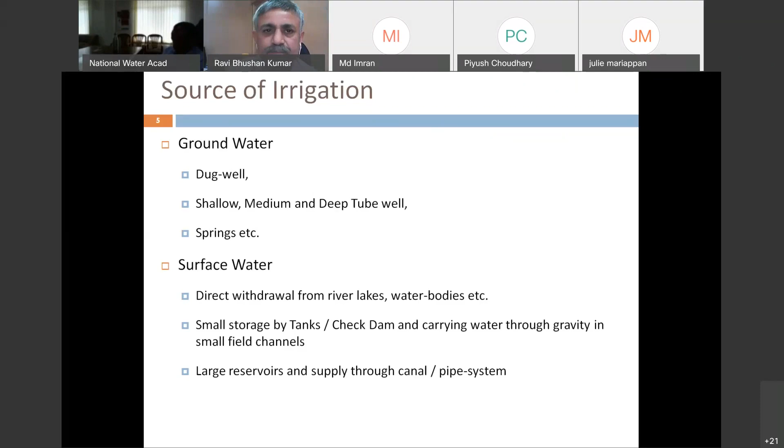Before we go further, I wanted to give an overview of how we categorize projects depending upon their size, into 2 or 3 categories. First is minor irrigation, categorized by the culturable command area—the area covered by that particular structure. If it is less than 2,000 hectares, we call it a minor irrigation scheme. If it is between 2,000 to 10,000 hectares, it's a medium irrigation scheme, and beyond that is called a major irrigation scheme. Minor irrigation schemes are serviced by either surface water or groundwater.

We have made an assessment of the ultimate irrigation potential—that is, whatever means we use, the maximum area we can irrigate through a particular source. By surface water minor irrigation, we can cover an area of about 17 million hectares in the entire country, while through groundwater we can cover an area of about 64 million hectares. The ultimate irrigation potential in the country is of the order of 140 million hectares. These are basically serviced by surface minor irrigation and groundwater minor irrigation.

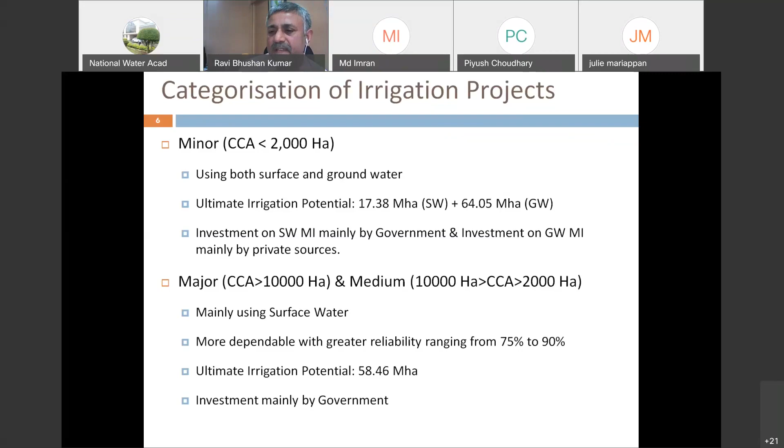So the dependability on minor irrigation is very less, whereas dependability on major irrigation is more. It is around 75 to 90%. That means we are sure that with this dependability, we can provide water to any particular field.

So as far as our assessment, the ultimate irrigation potential through major and medium projects is of the order of 58 million. And since this involves very big structures, the investment in these major and medium irrigation projects is mainly done by government.

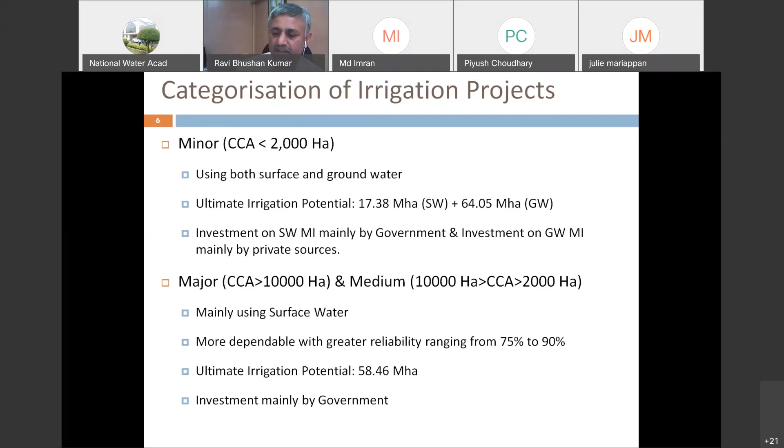As you all know, irrigation is being practiced in our country from the very past. Even we have records of inundation canals being constructed during the Indus civilization era, and ruins of many ancient irrigation projects are found scattered all over the country. Many such interventions were done by various rulers during their reigns to support irrigation in these areas.

Some very important structures I can mention, one is near Hampi. You can find many such works over there, scattered at different places. During the past, it was mainly through ponds constructed at different places to support irrigation, or at maximum through inundation channels, which take off from a river and irrigate lands. So the earliest example of any big system is basically the Grand Anicut of the Kaveri River.

That was developed something around the first century. This particular system was developed for irrigating the delta area of the Kaveri.

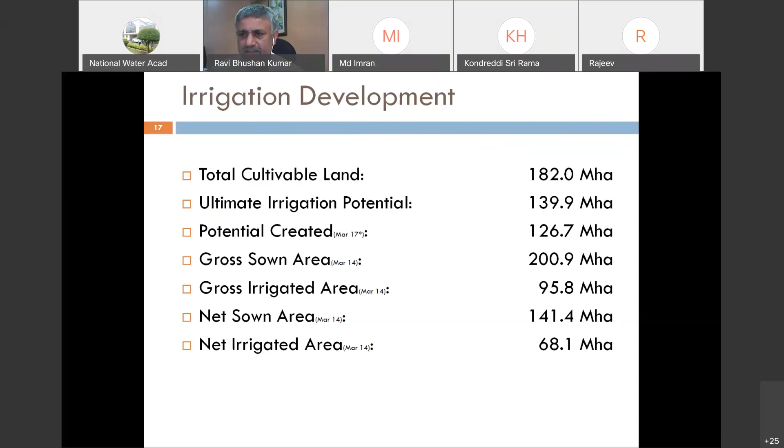Right now we are in a comfortable position. We are not only growing enough for our entire population, but to some extent some amount of export is also there. So at present our position is very comfortable, but we have to continue this pace of development so that we can support our population by the end of 2050, by which it is estimated our population will get stabilized. So we are planning for 2050 basically.

Now I will tell you something about the role CWC has been provided in developing irrigation in the country. As per the constitutional arrangement, the responsibility of implementing, designing, or planning these projects lies with the state. State governments have to plan, implement, and operate the structures in their respective jurisdiction.

But the role of central government is limited to a catalytic role—promoting states to develop irrigation potential where states are lagging behind. We are also financially supporting them so that irrigation can be developed in an equitable manner across the country. So the role of central government is basically catalytic, promotional, and to some extent adjudicatory. We are basically coordinating this.

If a project has coverage in more than one state, we coordinate this aspect. If there is any dispute among the states, we adjudicate those disputes so that a negotiation can be arrived at and the projects can be implemented. So the role of central government is limited to coordination, promotion, as well as adjudication.

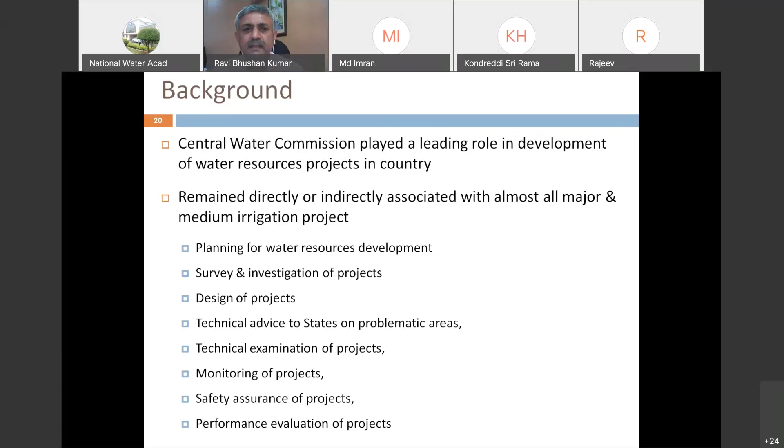I will just briefly go through these activities. The slides are available with you, so I'll briefly go through the activities because we have less time available with us. For example, if we see the planning aspect, whatever planning was done.

The role which CWC has is to take up assessment of water resources. Until and unless you have a measurement of any quantity, you cannot plan. So Central Water Commission was given the responsibility of assessing water resources availability in the country. We have done this exercise 2 or 3 times in the past, and we came up with the figure of how much is available with us. Central Water Commission is actively associated with Planning Commission in its various committees and working groups, and helped in the formation of successive plan periods. We provided all sorts of technical help to Planning Commission in taking up this exercise. Then in 1980, we came up with a national perspective.

As per this, it was felt there are many areas where we have more potential available, but the use of that potential is not there. So this excessive resource which is available at one place can be used in other places. So we came up with a plan which we call the National Perspective Plan.

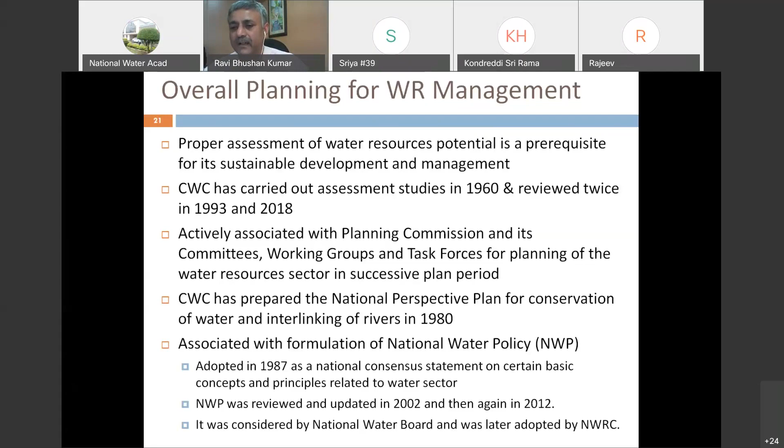The plan is now called interlinking of river basins. It was basically to get the water which is available in surplus areas to benefit areas having less water. That plan was prepared and formulated in Central Water Commission. Then we had the national water policy, and Central Water Commission played a very effective role in the formation of all these policies.

Nowadays it is felt that water resources should be planned in an integrated manner. For that purpose, a commission was formed in 1996, which went into various aspects and gave its recommendations on how to manage water resources in an integrated manner, and CWC actively participated in the formation of those. After that, we are now taking up integrated water resources studies in various areas.

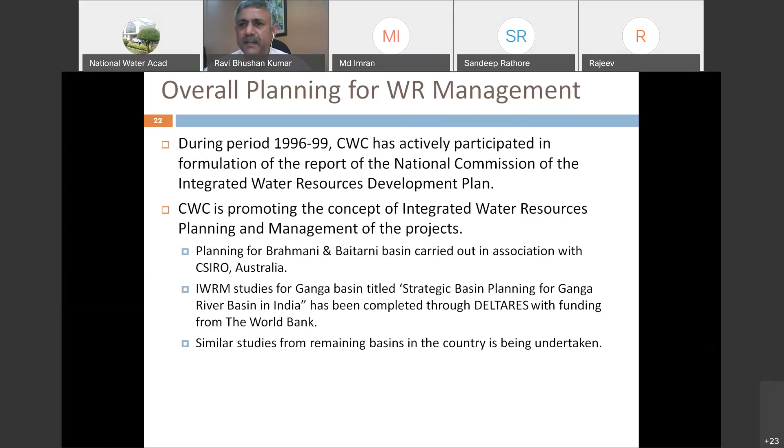Another important aspect is that we are collecting hydrometeorological data, and this data is very much needed for planning of water resources in the country. We are collecting such data at not less than 1,600 places, and they basically form the basis for planning of water resources projects.

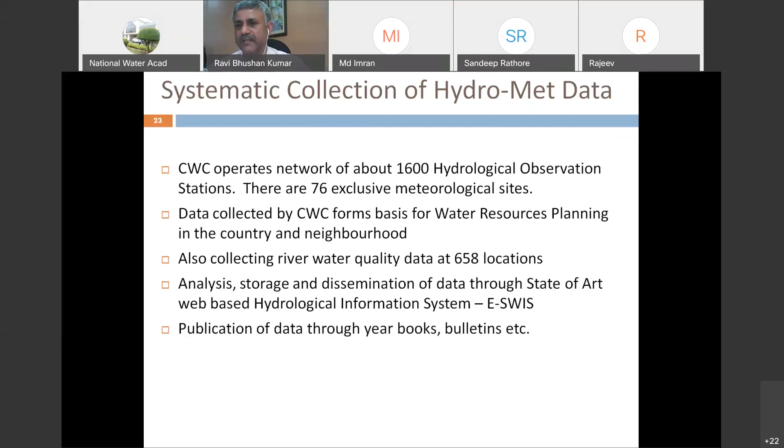We publish this data in the form of yearbooks which are utilized by state governments for planning of projects. This data is also available in the form of India-WRIS. Earlier it was India-WRIS, now this is being further redeveloped and will be available as the Water Information Management System. It is now available in that form.

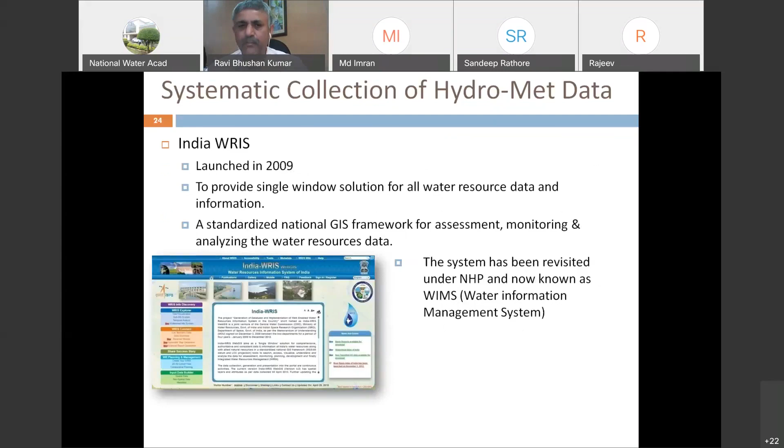Then there is design consultancy. We have supported states in planning of projects, design of projects, providing consultancy for troubleshooting, standardization of engineering practices, and special studies like dam break analysis. We have supported state governments with these types of things. At present, there are more than 70 projects for which design consultancy is being provided by central government.

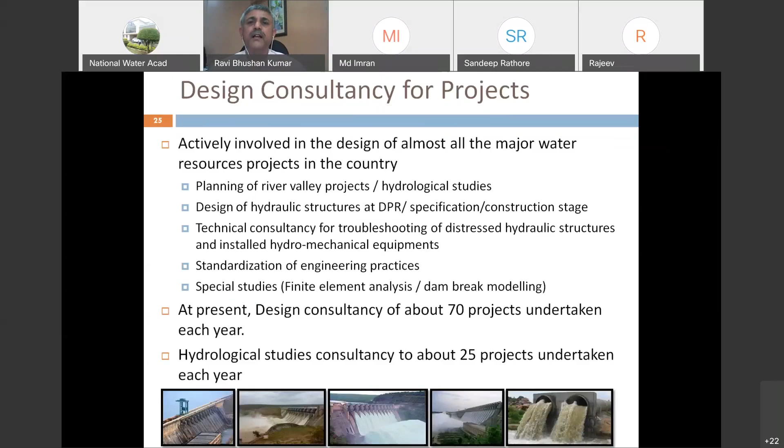These are some of the projects, only a few, which were important projects in which CWC was involved to a very large extent.

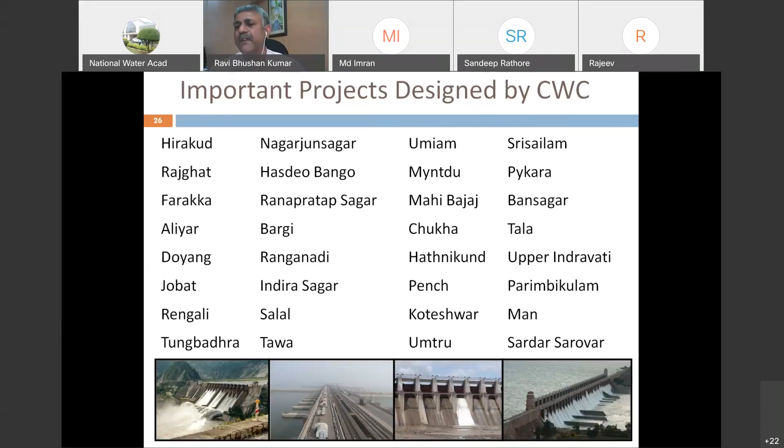Survey and investigation support is provided to states which are not capable of formulating the DPRs. Nowadays, some northeastern states, Jharkhand, and Jammu Kashmir are taking help from Central Water Commission in getting their DPR formulated. We are also supporting Nepal and Bhutan; many projects are being investigated there as well.

Then there is techno-economic appraisal. This has been done since 1954, supporting the Planning Commission in this regard. Now we are basically appraising major and medium type projects which have interstate ramifications, and flood management projects are also being examined.

We categorize large flood management projects into minor, medium, and large; large projects are appraised by Central Water Commission. We also support CEA in examination of hydro projects, which are projects specifically made for hydroelectric production, looked after by the Central Electricity Authority. We examine the civil and technical aspects, the proposed dam and structures, for CEA.

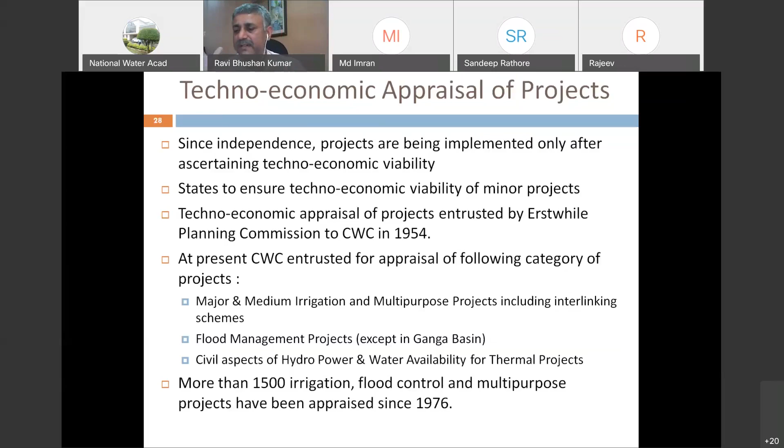From 1975 onwards, we are providing support in monitoring of projects. Right now, the projects monitored are basically some of the major projects being implemented by the states.

All the projects getting financial support from the Ministry of Water, Central Government, are monitored by Central Water Commission. This includes implementation of projects, command area work, and flood management projects. If it is an externally aided project, we also do monitoring on request basis, such as when the World Bank or any agency asks for it. On a sample basis, we also monitor the implementation of RRR of water bodies and CAD&WM projects. So all these things are monitored by CWC to some extent.

Central Water Commission is also using web-based monitoring service with the help of NRSC. We now have association with one agency, I don't remember the name right now. So we are trying to monitor these projects through satellite images also, to see what is the progress under them.

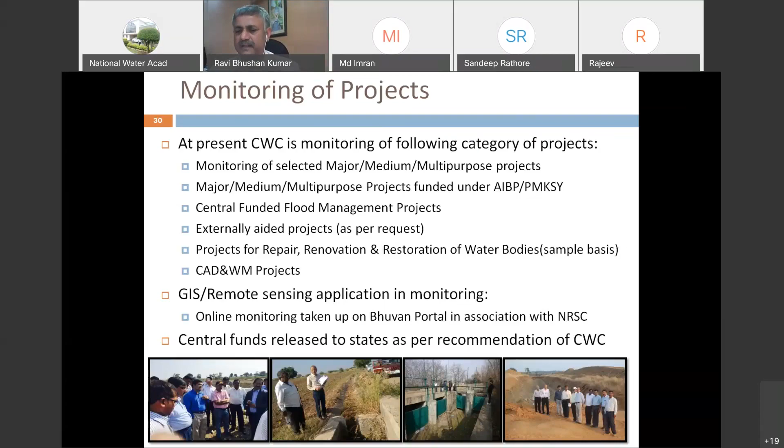The central funding to the state is basically provided after the recommendation of Central Water Commission. After we monitor the project, if we say it is working satisfactorily, then funds are released to the state.

Then for interstate coordination, whenever a dispute is there, we support the negotiation process to arrive at an amicable solution. If an amicable solution is not arrived at, tribunals are formed, and we provide technical support to these tribunals also.

There are many interstate boards constituted in the country for various purposes. We participate in the activities of those boards also. Wherever any unbiased view is needed by these boards, these are studied and provided to that particular body.

We also maintain a compendium of interstate agreements. Whatever interstate agreement has been arrived at in the country is maintained in a good publication, available in Central Water Commission. You can see this publication on the website of Central Water Commission.

Then, whatever international cooperation in the field of water resources is needed, we have exchange with Nepal, dialogue with Bangladesh and Pakistan also. In all these negotiations and activities, technical help is provided to the ministry whenever needed. We also participate in various joint level committees, through which exchange of data and exchange of technology takes place.

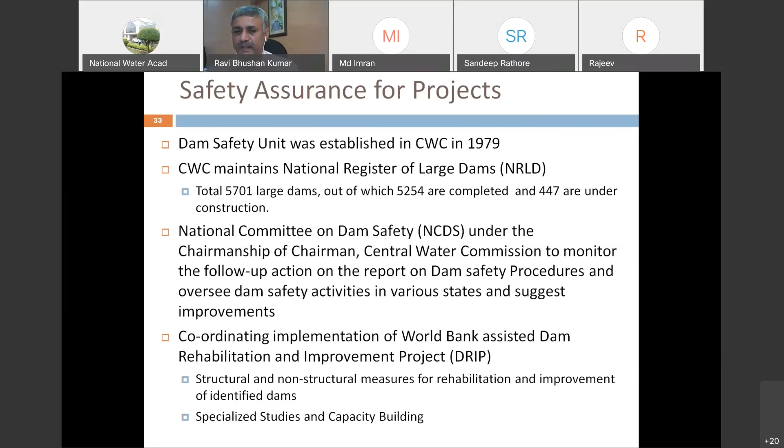We also coordinate a program called the Dam Rehabilitation and Improvement Project, in which many dams that are not in good condition are being rehabilitated with the support of the World Bank. We are coordinating that particular scheme also.

Under that program, we have come up with many guidelines necessary for ensuring the safety of dams - guidelines for instrumentation in dams, guidelines for how to ensure inspection of dams, and guidelines for rehabilitation. Many such guidelines have been prepared under this program, which are helpful to the states in maintaining the safety of these projects.

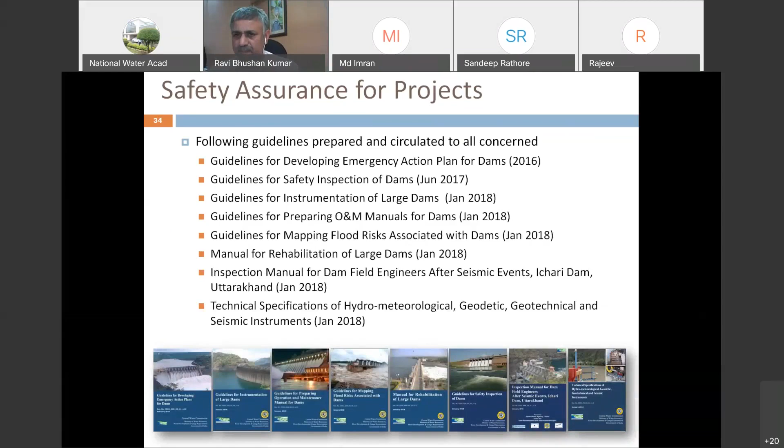Then, as I said, technology transfer and capacity building. The National Water Academy, which imparts training to various professionals in this area, is under Central Water Commission. Earlier we were limited only to service engineers in the state or central government. Now we are providing training to even teachers and other organizations also, so that awareness in the water sector could be raised.

CWC has come up with a large number of publications, guidelines, and handbooks, which are used by the states for the design, maintenance and operation of dams. Central Water Commission is also involved with BIS in making and finalization of Indian standards. The National Water Academy takes up almost 40 to 50 trainings every year, so that awareness in the field of water resources could be raised, apart from training resource professionals in central and state government for upgradation of their skills.

These are some notable points, as I said, remote sensing technology was developed and we started using remote sensing technology since 1979. We are trying to, and Central Water Commission is trying to promote states in more and more use of remote sensing technology.

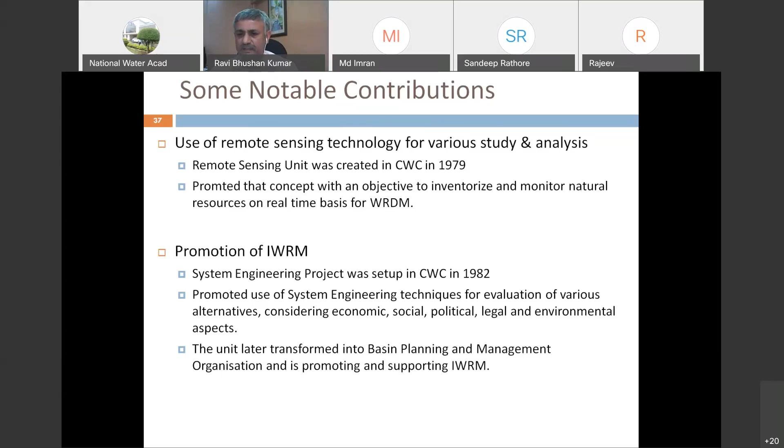IWRM, as I said, is now the talk of the town. IWRM is very needed for management of water resources because there are many types of demand and the resources are limited. Until and unless we supplement all these things through IWRM, it will not be possible for us to satisfy the demands of all the sectors. So for that purpose, system engineering projects were set up in 1982, now called Basin Planning Management Organization, which is supporting IWRM, and we are providing support in the form of tools.

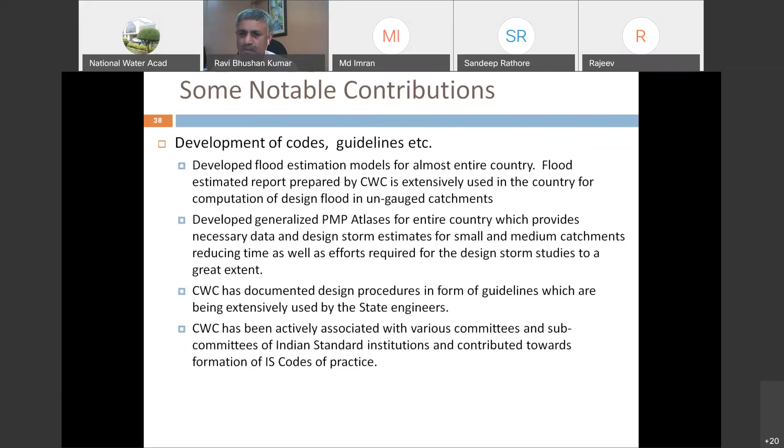We are developing tools for use in the states for scenario generation and all this through IWRM studies. Then, as I said, a number of codes and guidelines were prepared by CWC. We are involved in preparing the IS codes also. A few words about what future role there will be of Central Water Commission in the irrigation sector.

As I said, the optimal use of resources is needed so that we can cover the entire area. Water resources are not less in our country, but since it is not managed properly, it is being wastefully managed. So there are many areas which are not getting the proper water resources benefits. Water budgeting is basically a tool by which we try to find out how much water is being used by any sector, whether that use is optimal or not, and what savings can be done there.

So all these aspects come under water budget. We are trying to form water budget, we are in the process of doing that. Let us hope in future we will be able to find out these things and use this particular tool in a greater manner.

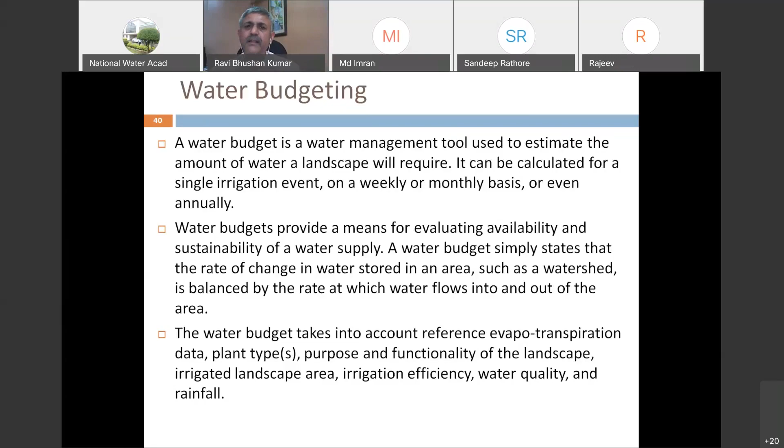Then water auditing, as I said, is a specialized thing to find out how much water is being wastefully used. Until and unless we try to find out those things, it will not be possible for us to save water. So we do water audit to find out how a particular unit, maybe an industrial unit or a command area, is using water, and whether this unit is utilizing water in a sustainable and optimal manner or not. This type of information can be found out only through water auditing.

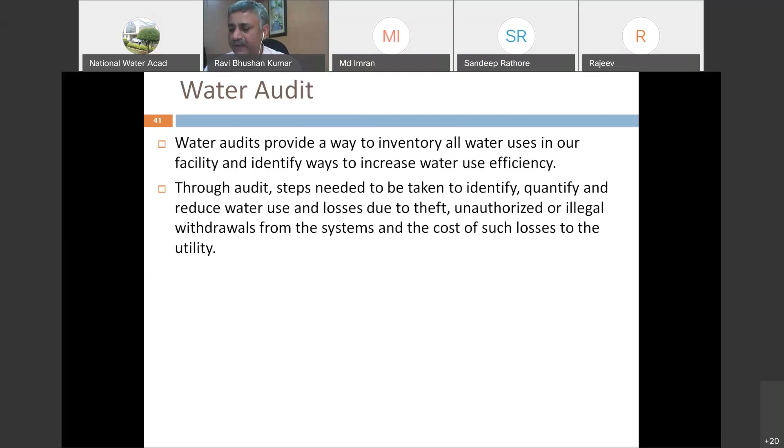Irrigation benchmarking - we have a large number of irrigation projects in our country. How they are behaving, whether properly or not, whether the efficiency is up to mark. Until and unless we have a benchmark to say okay, my project is performing at this level, but the benchmark is a little above or a little low, we cannot know which points the project is not performing on. So benchmarking is an index-based database maintenance so that one can find out what areas need attention. Through benchmarking we are basically trying to get into these aspects.

So as I said, a lot has been done, but still a lot is to be done. All the units, everyone has to support water resources development so that the water resources in our country could be used optimally and sustainably. Unless we do so, the problem of water stress cannot be solved. So there is a need that all stakeholders should come up and behave in a systematic manner so that we could utilize the country's resources optimally and the demands of everyone can be addressed. So this is basically the thing.